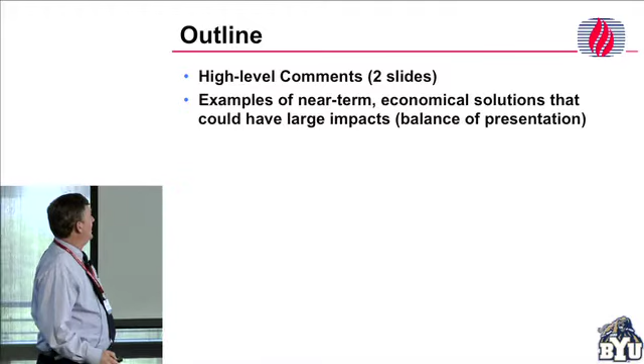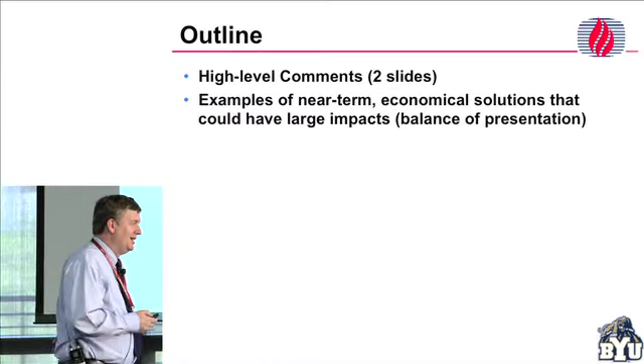For developing this general area of carbon sequestration, especially with negative carbon, I'm going to go through some of these pretty quickly. A couple of things I want to focus on: two issues that have been talked about in nearly every talk this morning, but I want to emphasize them. One is that the efficiency of a process has got to be one of the most important figures of merit if you're talking about carbon capture, and I want to focus on why that's so important and how that figures into the grand plan.

The other thing I want to mention is that economics are important, not just from the standpoint of people who are dyed-in-the-wool capitalists who want to make money, but if the economics of any energy conversion system become too bad, the whole system actually starts to fail.

I'll give you a couple of examples. The least economically developed nations in this world are also the most environmentally damaged nations in this world, because there isn't enough excess in their society to do anything about the environment. But it's not just the developing world that has that issue.

If you look at Europe, for example, just a couple of years ago there was far more enthusiasm for carbon capture and global warming than there is now. I would argue that the principal reason for that is the economic downturn and the lack of enthusiasm people have for investing more money into something they don't see a real economic return from.

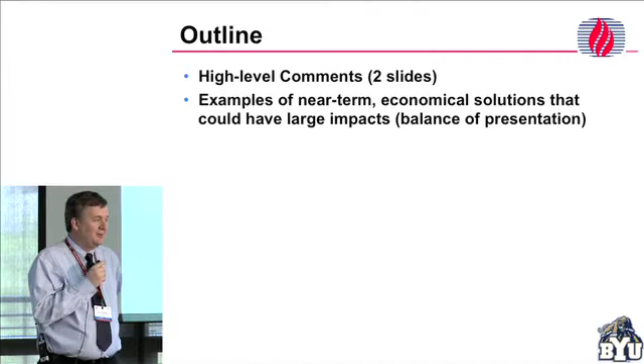So both for developed and developing nations, the bottom line is what we need to focus on are sensible, practical things that are reasonably economical and efficient. And that actually figures prominently into some things.

I enjoyed very much the talk just a few talks ago - these are actually slides from the IEA version of that same report we were discussing. But I come to a couple of similar conclusions, and a couple of different conclusions.

One is that if you use biomass for trying to capture carbon, this shows the amount of carbon you can capture depending on what technologies you use, but you can't add these together. The first and most important thing here is that the limitation in all of these processes is the biomass supply. It's not the ability to sequester CO2, it's not even the ability to transport the biomass - it's the availability of biomass itself.

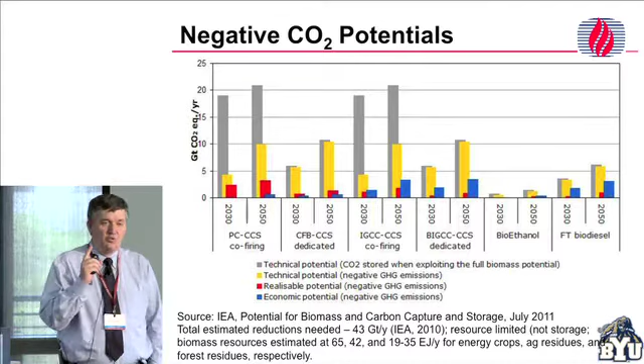In any one of these technologies, if you co-fire biomass with coal, you could break this out into several different analyses, but the technical potential of sequestering CO2 is about 10 gigatons of CO2 equivalent per year. Or you could do that in circulating fluid bed, or in IGCC carbon capture, and you can see several other potentials here. But you can only do one of those - you can't do all of them. There's not enough biomass to do all of them.

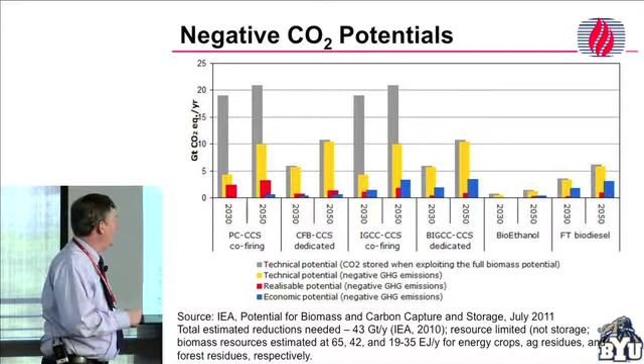If you go through and ask which of these are the most realistic, the most efficient, and the most economical, the picture changes dramatically. This is something we can do essentially today, and it's actually almost cost effective, not really quite. By contrast, this dedicated biomass process with an IGCC is something I'm not too sure we'll ever be able to do at the same kinds of efficiencies and costs as these other things. So when you make these kinds of choices, you have to keep that in mind.

Similarly, if you look at the energy potentials and the total down here, the biomass resources are estimated at - we saw some of these numbers - 65, 42, and somewhere between 20 and 35 exajoules per year for crops, ag residues, and forest residues. One thing I point out frequently is that if you add the total residues available - materials that won't affect food supplies, won't affect other kinds of economics, won't require additional agriculture, which has significant downside in terms of environment.

The residues are as much as the energy crop potential that we think we could achieve if we put all arable land into energy crops. So to me, the fairly obvious initial target should be these residues, not energy crops, where there are a lot of significant environmental and economic issues associated with energy crops as well.

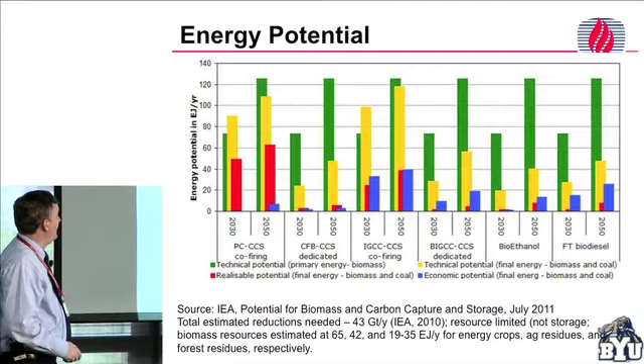So if we come to negative CO2 emissions, this is going to inherently involve carbon capture. It will also, if it can involve a ubiquitous source of energy that you don't have to pay for—for example, sunlight—then you can actually get to a point where you can do negative carbon capture.

So in the very broadest sense, you say, how important is it to actually get to negative carbon capture? Well, in the broad sense that negative carbon capture represents very highly efficient carbon capture, I would say it's essential.

I think the kind of 90% nominal target that we talk about for capture from coal-fired systems is an arbitrary and poor choice of a target. That is, the last 10% of the CO2 in that stream is going to be far, far cheaper to capture than any other source of CO2 being emitted from, for example, transportation systems or other kinds of things.

So the idea that we stop at 90% after having made the investment to get there—the incremental costs of going from 90% to a very high capture efficiency are much, much lower than the cost is going to be, for example, for capturing an equivalent amount of CO2 from automobiles or especially from airplanes.

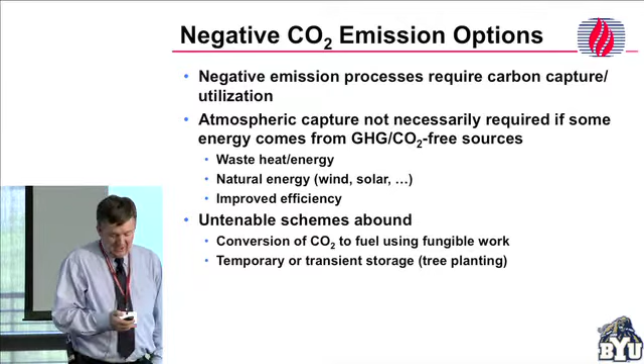But what if we take the narrow definition? How important is it that we actually become negative in the absolute sense of the word, that we're capturing more CO2 than we're producing? And is that even really possible? I'll show you some scenarios here that will show it is potentially possible and might even make some good sense sometimes.

So to put that in realistic, absolute terms: if you co-fired a modern supercritical boiler with biomass, you'd be converting the chemical energy in the biomass into electricity with about 40% efficiency, just under 40%.

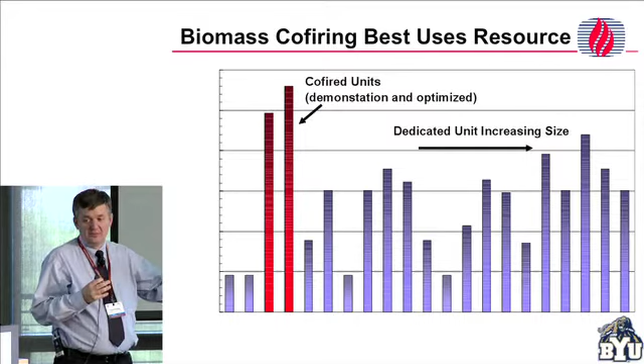There are many of these that have appallingly low efficiencies, and they're fairly inherently less efficient than coal-fired power plants because they're much smaller, and because they're smaller, they can't be built with the same kind of reheat and recycle loops that you can with a large-scale coal facility.

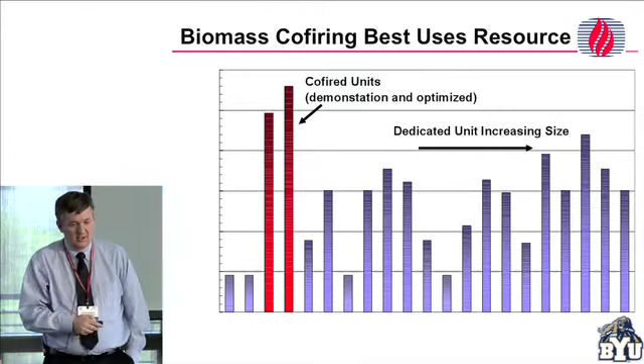And furthermore, if you look at the cost of electricity from those systems, especially those that operate on seasonal bases, the cost of electricity is very high because you have to pay for the capital of the whole plant, and you're operating it sometimes only a third or at most half a year in some cases. All of the ones that show up here operate all around the year, but some of them are seasonal systems.

So that don't. I'm going to give a couple of examples of some technical issues that are critically important, I think, in implementing co-firing.

In general, if you mix the biomass with something like coal or some other reasonably similar product and convert it in either a gasifier or a combustor, that's going to be a much more efficient process, and it's going to be a much more economically efficient process than any dedicated biomass system would be. But it's not that it doesn't come with issues.

There are fairly significant issues in co-firing biomass with coal, and I'll point out a few of those in some detail. There are a lot more than we can talk about here, but just to give you some ideas of some of them. In broad issues, if you're co-firing it, there are fireside issues, that is, in the boiler.

So I'll take a guess that there might be at least some people in here that aren't too familiar with how electrical power is generated from coal-fired power plants. To put this in perspective, in a typical pulverized coal-fired power plant, you create a fireball that's roughly the diameter of this room and 10 stories tall, and that's inside of a 30-story building, and it's being fed coal

at anywhere from many tens to a few hundreds of tons per hour. So these are very large-scale operations, and what you're trying to do is feed some amount of biomass into that system. So how much biomass do we have?

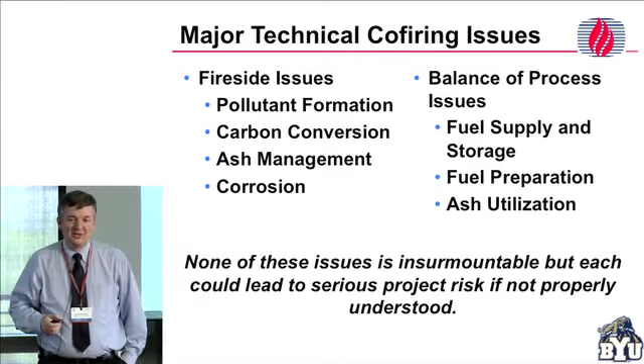There have been a lot of estimates, but I would guess that an upper limit of the amount of biomass we have in terms of its thermal energy compared to coal is about 10%. So if we were to do this uniformly in all power plants across the country, we would maybe get 10% of the total thermal energy in the power plant in the form of biomass. The rest of it would be coal.

So you're putting a relatively small amount by energy into this large conversion facility, but by volume, that turns out to be more than half of what's going into the power plant, because the biomass energy density is less than 10% of that of coal typically.

So on the fire side, there's pollutant formation issues, carbon issues, there's big ash management issues, potentially very big corrosion issues. And then outside of the firebox itself, there's fuel supply and storage preparation, and what you do with the byproducts, the ash utilization and other kinds of things.

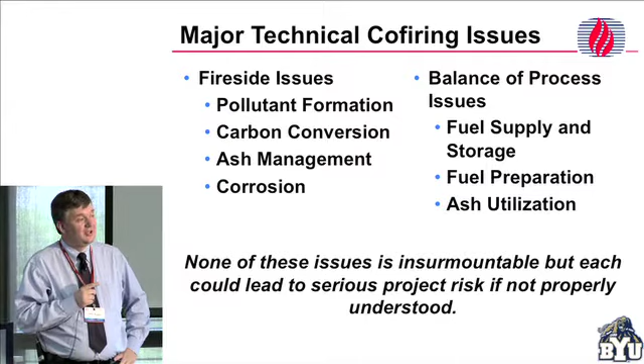And all of these have been looked at. There are solutions to all of them. However, if you don't do a clever job, and if we don't develop the tools to do a clever job, some of these can be devastating to the operation of the rest of the power plant. And I'll give you just a few examples of that.

So one of the first examples is corrosion. Most biomass fuels have a fairly significant amount of alkali material in it, typically potassium, sometimes a little bit of sodium, and commonly a fair bit of chlorine.

And in particular, the faster the material grows, like an energy crop, and the more actively growing it is when it's harvested, the higher the concentrations of those are, because the potassium, usually in the form of potassium chloride, is what's responsible for transpiring the water through the biomass and getting the biomass to grow, bringing the nutrients through it.

It has been the common experience of people using biomass that if you're not careful about the type of biomass and its properties that you use, you can corrode out the components of your billion-dollar boiler, designed to last 20 to 60 years, in about a year, or sometimes less. That's a pretty major practical problem.

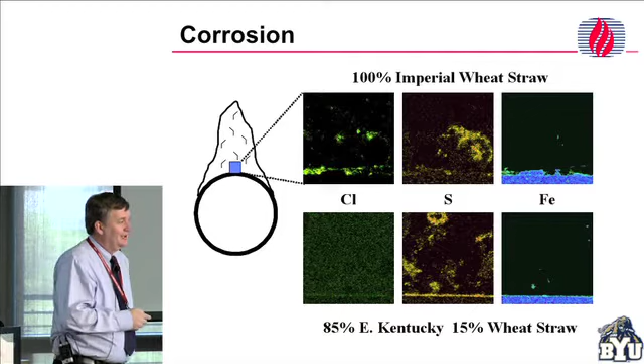Understanding in detail these kinds of interactions is one of the fundamental important issues that need to be understood. For example, if this were a gasifier instead of a combustor, this would not happen—the potassium chloride would not form a sulfate, and you would still have the corrosion problems. Understanding those kinds of details is just one example of some pretty critically important stuff.

I didn't choose a very good biomass particle here, but the principle is the same. Coal particles, when coal is burned as pulverized coal, are about the size and consistency of household flour—not quite, but considerably finer than sugar or salt. Biomass cannot possibly be made to that same size, and trying to get biomass down to that size would take an enormous amount of energy.

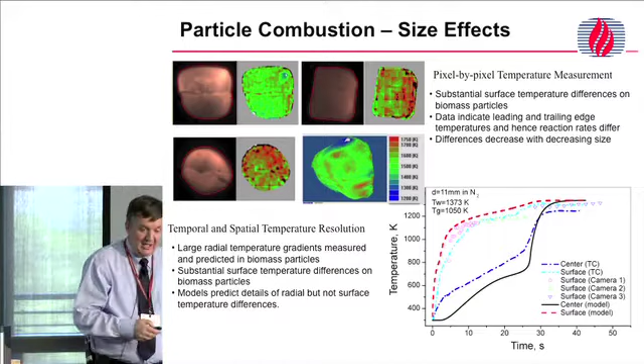Nor is it spherical. So this is an example of looking at biomass particles with a camera. We've developed a way of getting a pixel-by-pixel indication of the surface temperature of that particle, then recreating the three-dimensional particle, giving an idea that these particles don't burn anything like coal particles—and understanding that is a fairly critical issue.

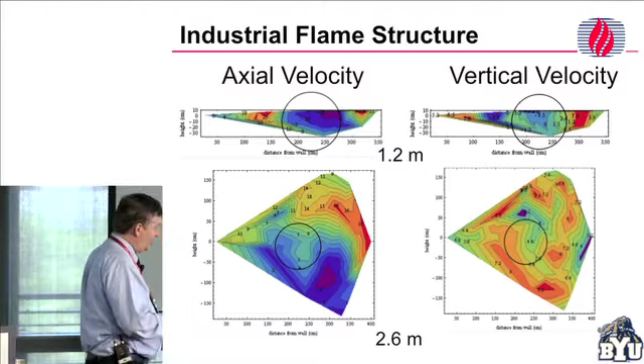These are some of the first data of this type ever collected, I think—commercial-scale, near-burner measurements of the flame structure in a real commercial application of biomass co-firing. Understanding the dynamics of that flame is also pretty important.

So there is a huge amount of very fundamental work that needs to go on to make these systems really work well. But the practical application of putting these into existing technologies is pretty important.

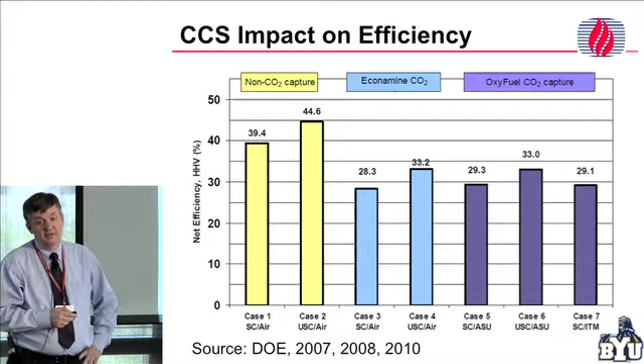So doing carbon capture consumes something like a fourth to a third of the output of a power plant just to run the capture system. That's a huge penalty from the standpoint of practical things.

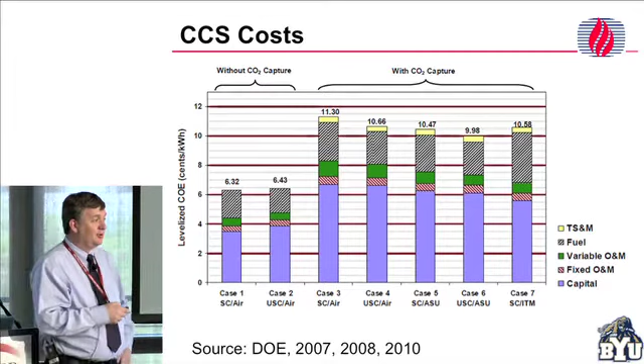If you look at the impact on costs, these on the left show costs without carbon capture, and this is costs with carbon capture using several different technologies. The bottom line is you increase the electrical power generation cost by about 80% by doing carbon capture for most of these systems.

We've developed a system—let me back up. That comparison assumes building two power plants with the same output and comparing their operating costs. But a more realistic way of assessing cost is to ask: if I were to take my existing fleet of power plants and implement carbon capture, how much would that change the cost of electricity?

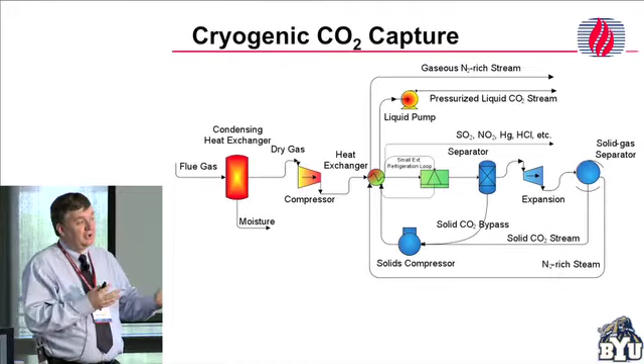Instead of being an 80% increase, that would come out to be something more like a 500% increase because of the sizable amount of additional capital you have to invest in modifying existing plants. So you're not building them all over again. If you do have to build them all over again, then you're looking at not just the cost of implementing carbon capture, but the cost of replacing the existing plant as well, and that's a much larger cost.

That's actually far more significant than the carbon capture cost directly. So this is a process we've developed that at this point has been demonstrated and verified, including by Fluor, who are the purveyors of the principal competitor to this technology. They were in my office the other day and said there's no way they can compete with this process, and asked how we're going to do something together.

So this is another carbon capture process that can be implemented in a couple of ways. You basically modestly compress the flue gas, put that through a series of heat exchangers, expand it again, cool it down to the point where the CO2 desublimates. You separate the solid from the gas, warm everything back up again, and you end up with a CO2 stream and a gaseous stream. There's another version of the process that doesn't require compressing or expanding the flue gas, which makes the equipment easier to specify, but the process gets a bit bigger.